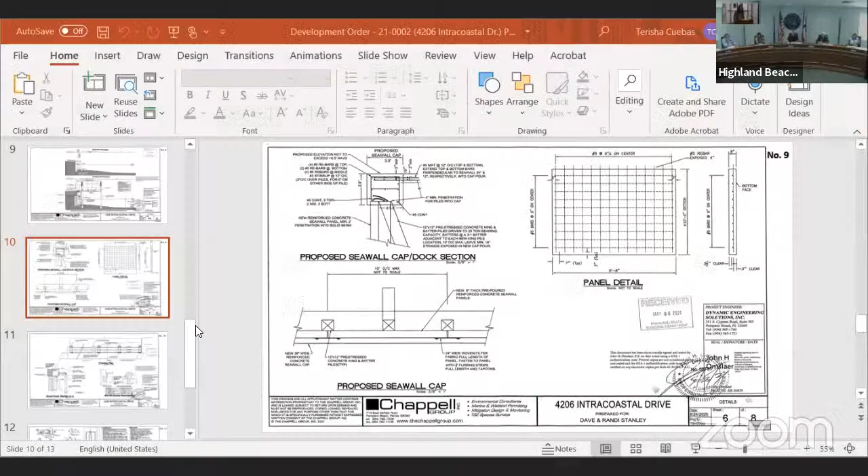Town Planner Allen, please present your recommendations. Good morning. Let's start by looking at the aerial for the property. If we could go to slide number 1, this is on page 18 of your packets. This aerial is looking northward. You can see the property is a double lot that was unified via a unity of title, which was approved by the Town Commission on September 19th, 2019.

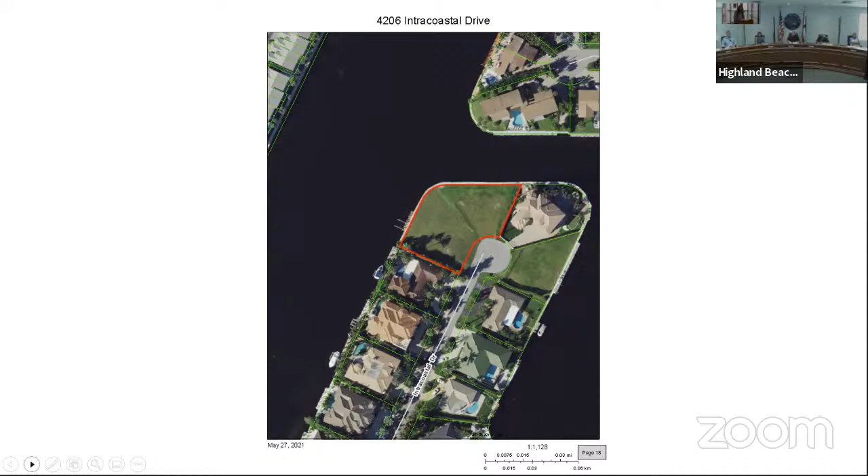If the board recalls, back on June 11th of 2020, the board approved a 3-story, 10,857 square foot single-family residence with a pool and spa at the property. If we could please go to slide number 3, these are the proposed conditions, based on the applicant's request on their application. This is on page 102 of your packet.

Let me get into a bit more detail on the request as it pertains to the seawall and the dock. I've noted these details in the planning report. The 704 square foot dock includes a 140 square foot wood dock and a 564 square foot concrete dock, which together total the 704 square foot dock. With regards to the seawall, it is within 18 inches waterward of the existing seawall, which will remain in place.

According to the plan set submitted by the applicant, there are 4 lift piles proposed for each boat lift. These are going to be elevator lifts. The height of those piles is provided on the plan sheets, which start on page 101 of your packets. If we can go to slide number 7, please.

Here you have the section sheet for the 3,000-pound capacity jet ski lift. You can see that the top of that lift for the jet ski is 2 feet, 24 inches from the seawall. And then if we go to the next slide, number 8, this is the section sheet for the larger boat lift, which is 33,000-pound capacity.

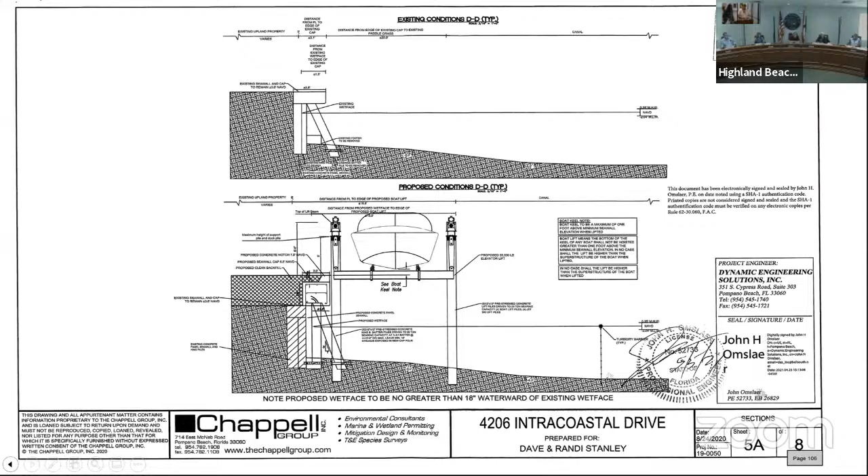Right, so that shows the lift, that one you just showed. Go back to that one. No, go back to the one that's horizontal, that one, no the other one. That's not the lift, right? That is the lift, that is the one. That was the existing condition on the top, right there. So that lift is up against the seawall cap. Correct, so there's no dock between the lift and the seawall, right? Correct. Okay, so in our packet on page...

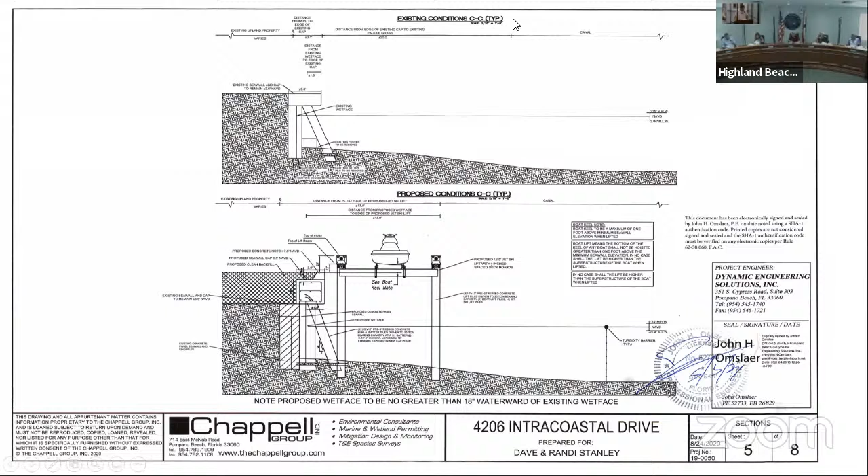33, I'm just trying to understand, in our packet on page 33, there's a notch that you have to retain back the land, which I think is a great idea. But then there's a proposed notch at the end of the dock. And I'm just trying to understand what that notch is.

I don't have page 33. Can I look at yours? Yeah, but that's not what's here.

Let me just clarify, page 33 is specific to the FDEP permit. Those are the plans that were submitted as part of FDEP. The plans that are 11 by 17 that were in your packets were the plans that were submitted to the town. Sometimes there are some changes, however, with regards to the seawall cap, with regards to the concrete notch. What is submitted to the town is what is before the board for approval. So please make sure you start looking at the 11 by 17 pages that start on page 101 of your packet.

Okay, so one had the notch and one didn't have the notch. So they're not putting that notch at the end of the dock. That's the answer, right? At the end of the dock, what was submitted today to the...

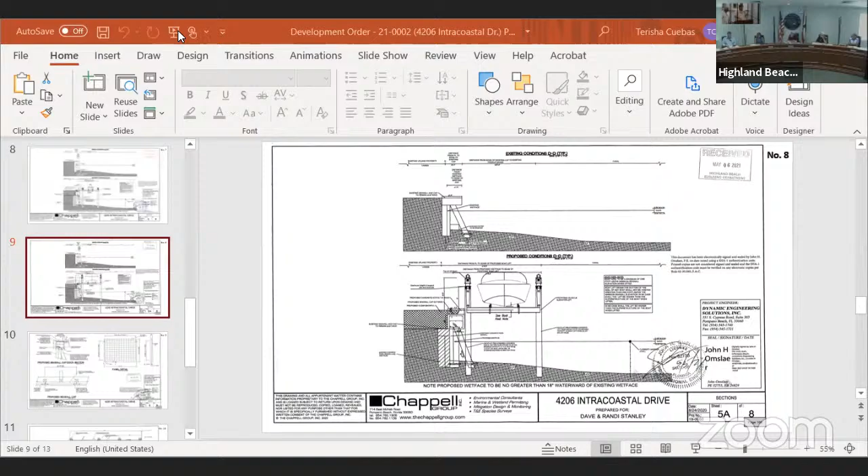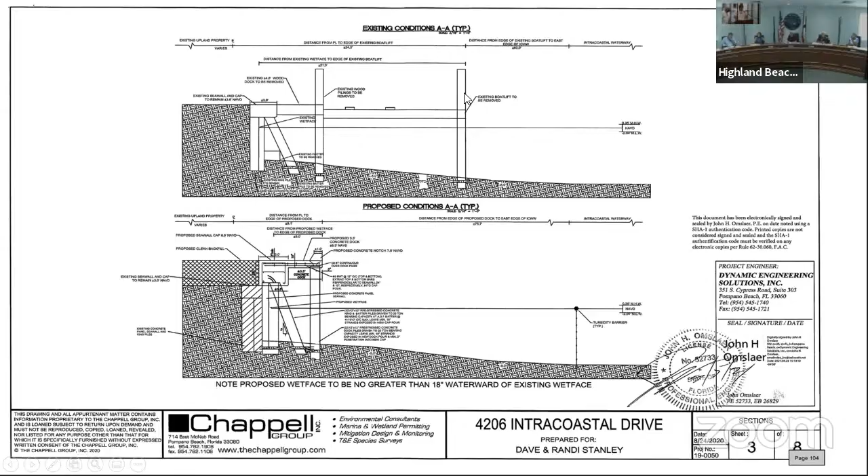If I could see your picture, I could explain it. Yeah, page 33, I'll show it to you. I don't have it. Right, is it this?

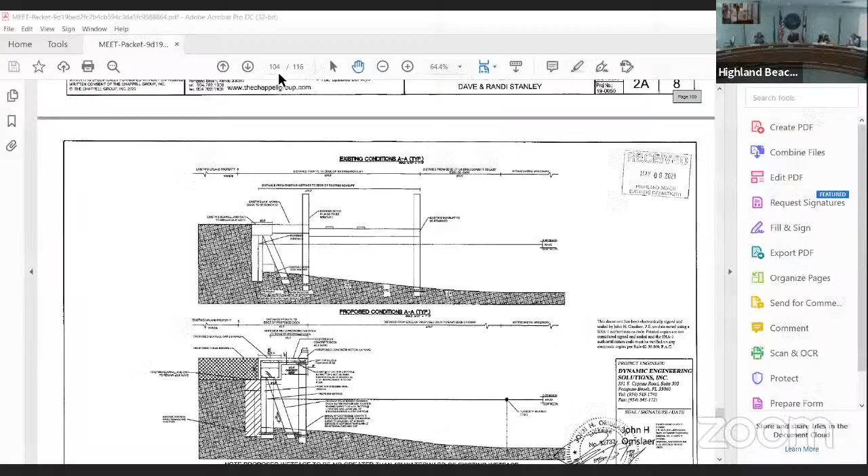You have this notch retaining the property, and then you have this notch, which is at the end of the dock. That's at the end of the dock, the concrete that overhangs on the cap. This is because this steps down, you know. So what's the purpose of this?

So if you follow, okay sorry. Okay, so this is the FDP, right? And then what you have up there is what you're proposing as far as a plan submitted to the town, so this is that? No, this is FDEP, what we put, this is what's on there, correct? No, on the screen, wait, that's the wrong one.

Oh, page 33 of the packet, I'm sorry, I thought that was slide number. No, page 33 of the packet, that's correct. So if you, I'm just looking for a clarification, that's all.

I would really need this notch here. That's all he's looking for. He understands that this one is to retain the fill. This outside notch, the first notch on the cap, is to retain the fill.

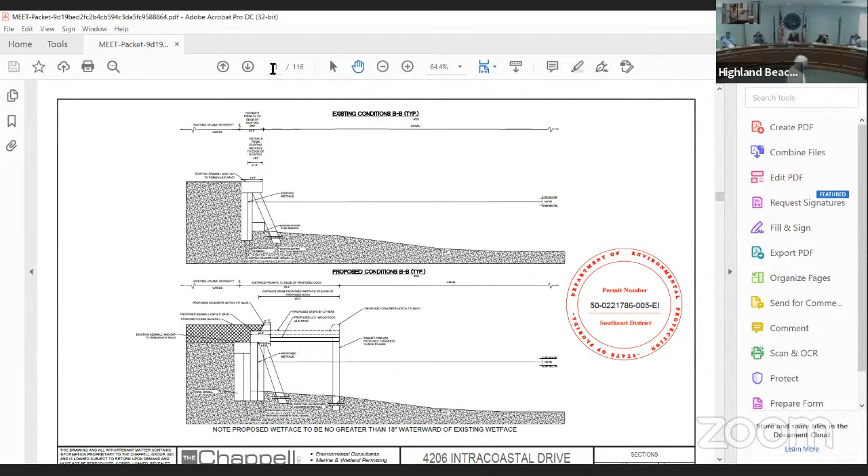Understood. The second one is if you go to the site plan that shows that cantilever out. Could we see that slide please, that would be page 3, proposed conditions. Could you please go to slide number 3.

Pointer? Yeah, I can't even see that far. Where do I click? Oh, the red button?

It's almost like a parapet. The dock where you're going to be getting on and off the boat is at a lower elevation, so there are steps going down to that dock, and there's a jog where the steps are, so you have to start and stop the curve.

Does that make sense? Terisha, can we go to slide number 3, please? Oh, okay, thank you.

And it's showing a cross section. The FDEP is actually showing a cross section of the two curves.

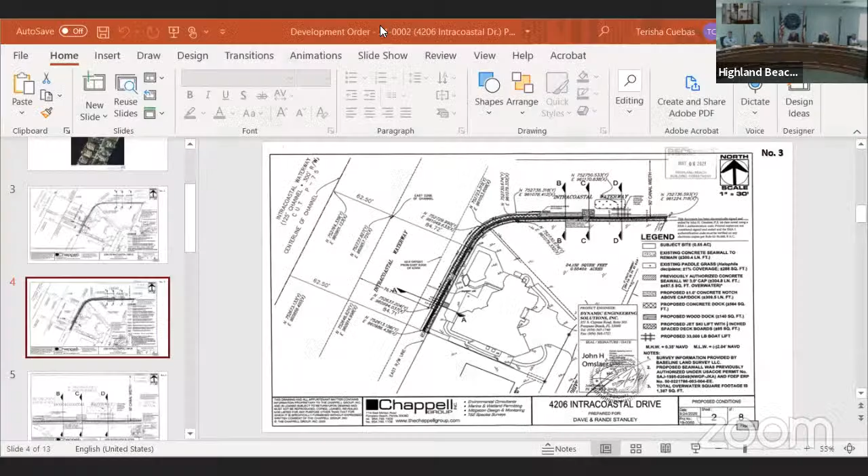So if you see right in that area, Roger, where the concrete cantilevers out over the water, you have the curb at the end of it, and then you have this dock right here, which is at a lower elevation, so there are steps going down to that dock. So the curb has to continue on the water's edge, come back into the property, and then continue across the backside of the dock that you get on and off the boat of. So that's why you're looking at a cross section on the Army Corps and DEP.

So the steps are actually narrower? No. Step the width of the dock. Okay, all right, I get it.

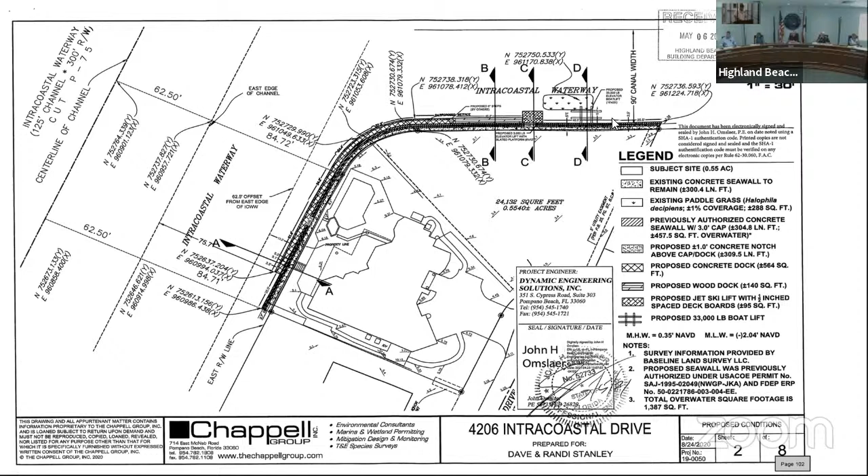So, all right, are there any other questions for Ms. Allen? And Brian, stay there for a second—are you going to make any other presentation, or do you feel it's not necessary? Unless you guys have any further questions. Okay, does anybody have any further questions? I'll make this like, for either Ms. Allen or for... okay, all righty, thank you.

If there's no further questions, and the board has no other comments to make, then I will close the public hearing and ask if there's a motion to approve with conditions, a motion to approve, or a motion to deny this request. I make a motion to approve it. I'll second. Vote, please.

Member Demas, yes. Member Brown, yes. Member Mendelson, yes. Member Adwire, yes. Vice Chairperson Goldenberg, yes. Chairperson Axelrod, yes. Motion carries.